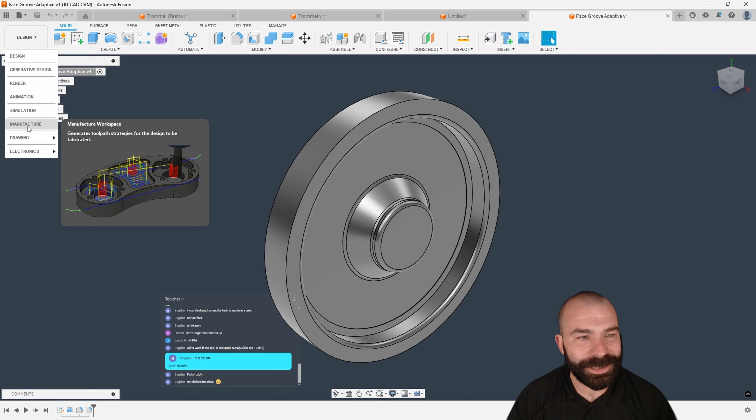As you can see, again, lovely part provided by Tim out there. Tim, I don't know if you're still there, but let's go ahead and switch to manufacture and create our setup like always, XYZ.

We're going to go ahead and sheet the system with some normal size stock. Face grooving adaptive was my hope. Okay, yeah, no problem. So what we're going to do is we're going to go ahead and do our turning grooving. Where is it here? Turning adaptive roughing.

$5.40. Hey man, that's still, if you guys didn't know, we have $2 cans at the local bar by me. To me, that's 3 beers. I will drink that all day, every day.

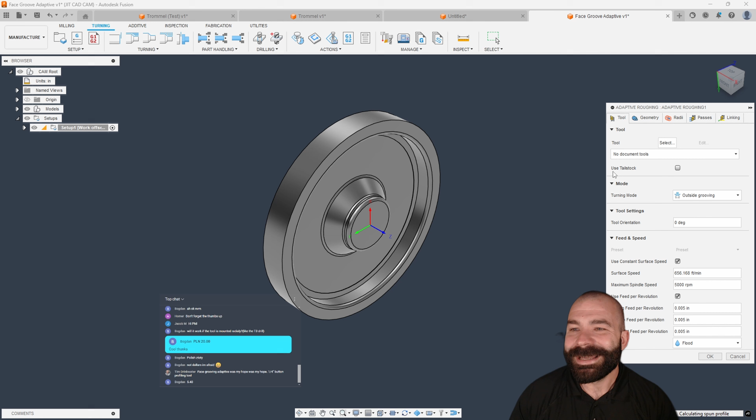So as you guys can see, by default, you have outside grooving. You also have inside grooving. What I like to do is leave it plain as day and come back to it later to see which one we're really going to need. So we're going to go ahead and go with some OD grooving here. This is a lollipop tool.

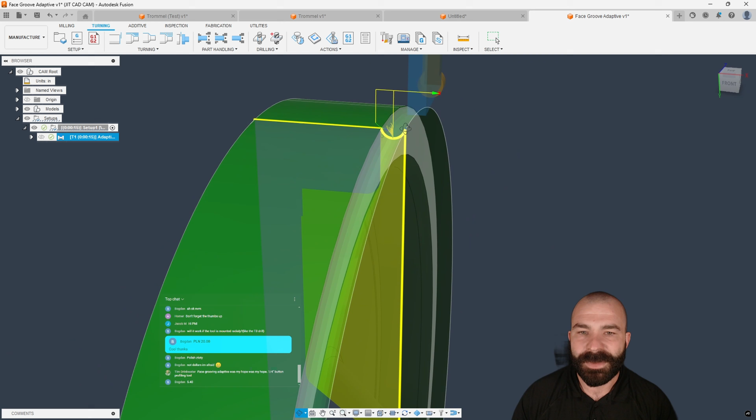Now I am going to have to rotate this tool at some point, but let's just see what we get, because usually what happens is, like I was expecting, this is an outside profile with a tool pointed down at my part, right? So let's get back in there.

Let's edit our tool. First, we're going to start by pointing that tool a little different direction. Again, we're going to go ahead and hit OK.

And as you're going to see, I just caused Fusion to crash. So we're not going to send the error report. We're going to hope that she stays here. It doesn't look like she is going to crash.

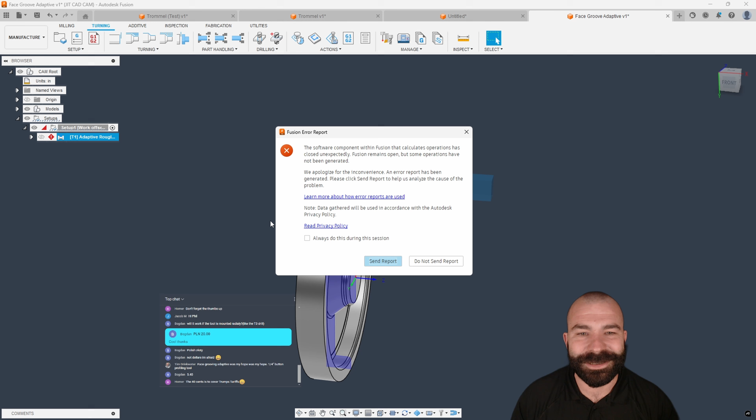Now, as you can see, I'm going to go ahead and make a secondary change because it's not liking that, which is going to be, let's do inside grooving and see what happens. So again, I don't think we're going to actually get this to work. Axial retract is greater than axial stock. So let's go ahead, and axial usually means long, stock front, stock back. I think we are getting a limit issue here.

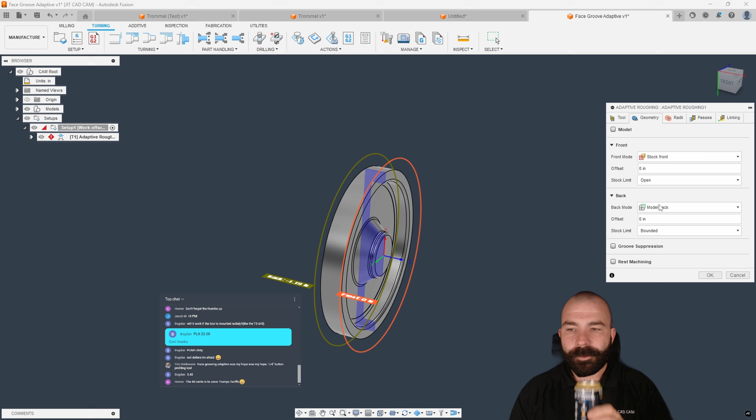And let's see what we can come up with. So again, it looks like we are getting some type of issue. Axial retract distance is greater than axial stock. Yep, when in doubt, pull it out. Nope, still nothing, right? So let's go back in.

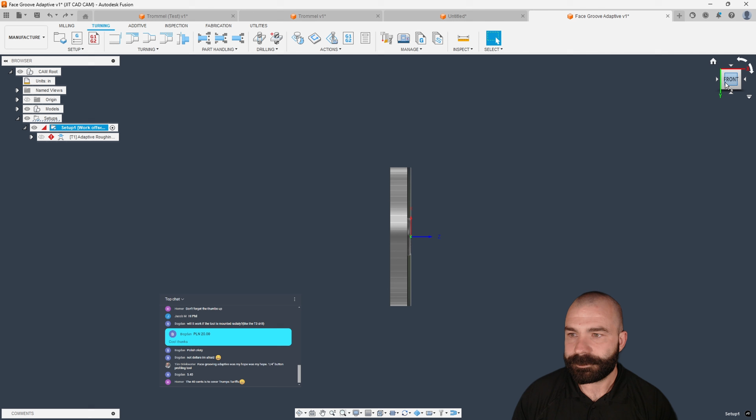40 cents for the Trump tariffs. Love to hear it. All right, let's see here.

We're going to go ahead and dive through this a little bit bigger. Approach in Z, retract in Z. That's beautiful.

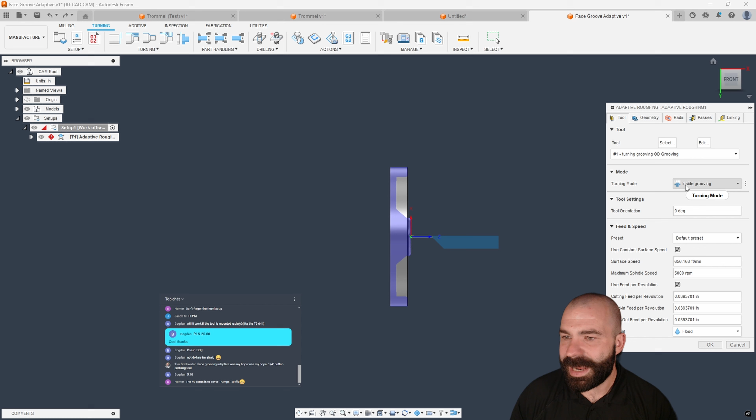Yes, yes, yes. So as a whole, I think the problem is coming from the fact that I have seen this, and I think I know what it is now, looking at a side profile: there's not really anything radially to start with. So let's go ahead and change something.

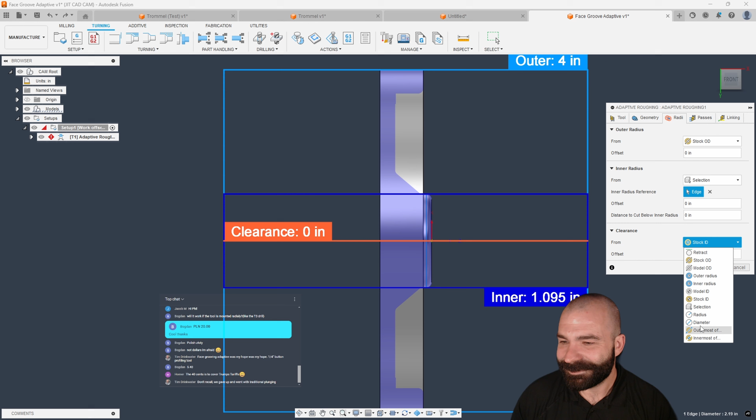We're going to go ahead and do a selection here, and then what I am going to do is we're going to make this also inner. Now this is going to look really weird for a lot of you out there. The problem is, I think, when it's trying to retract off because it's inside grooving, it's hitting this lug in the middle, and it does not like that. So we're going to go ahead and bump that out just a little bit further.

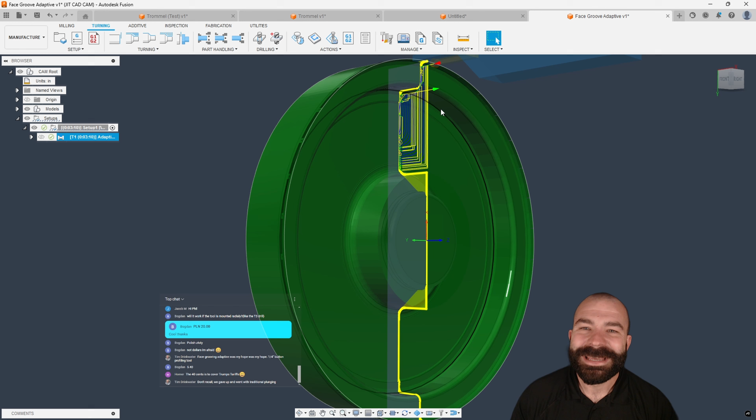Because again, it's more important to get a tool path at first than it is to really get the right tool path. So it's like I'm thinking, and I've seen this a lot, and I know Autodesk is working on it, it's due to the profile we're working with. Pro tip here for you guys: if you ever are working on a lathe or an inside profile, do a section analysis under the inspect tab.

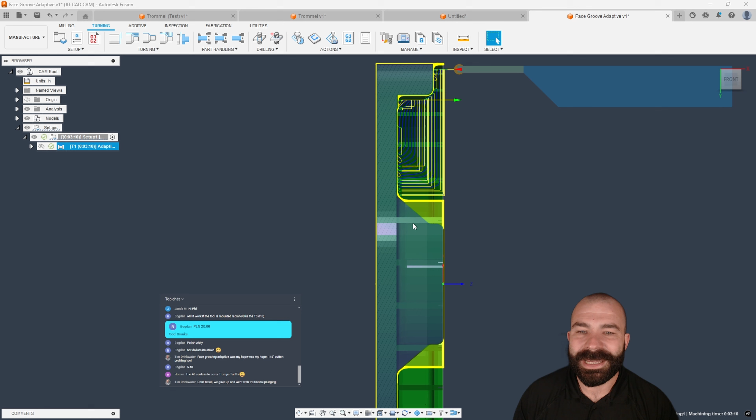This will split your part in half, making it much easier to see what's going on. As you can see, this lug in the center is part of the problem, right? So let's go ahead and make a few more changes to this.

Again, we have our radii working here. Let's go ahead and move our clearance inwards. Now it's not going to like that, which is no surprise, but maybe we can sneak this guy out a little bit further without having those problems. There we go, we've moved outwards, still having those problems.

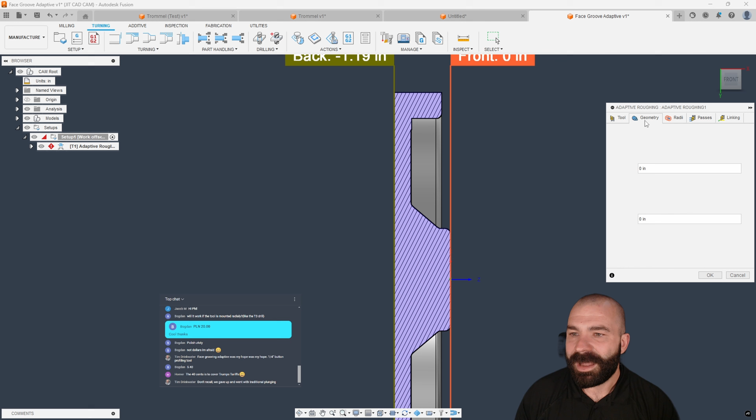I'm curious if we actually switch now to outside grooving. There we go. So it was yours truly fighting the system, because usually people don't give me a center hub with all kinds of problems.

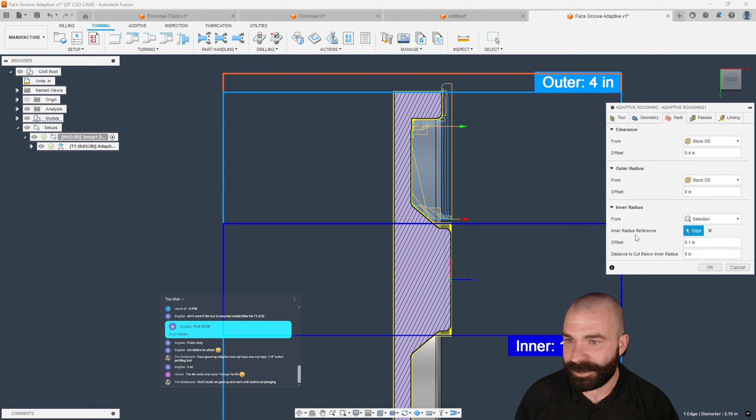Tim, just kidding. So again, we're going to go ahead and just leave this to inner radius, if I can find it. Inner... oh, we're outside now, of course we're outside. So we need to actually come down to here, and leave this at 0.

Tim, how's this looking? Tim, you're not complicated, it's just not the best of examples. But this is about as real world as it gets, guys, right?

Like, why is it that yours truly out here tells you guys, come here on Friday, hustle Fusion Phil with your problems, try to stump the chump, whatever you guys want to refer to it.

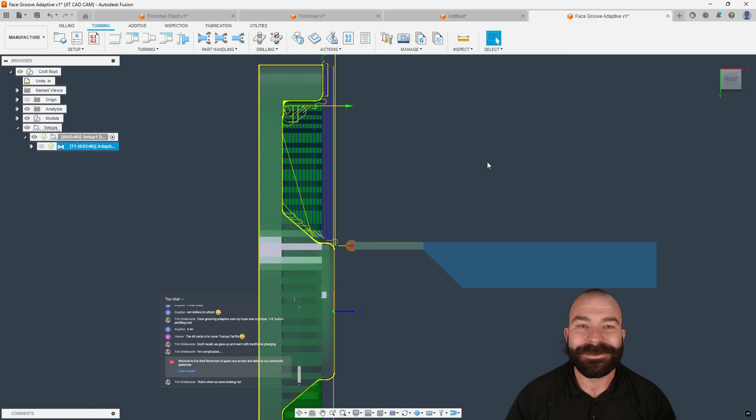So again, just running it from the top. This is my recommendation: I go turning, I'm going to go in for that adaptive roughing, I'm going to select my tool again, this time I'm going to hit OK.

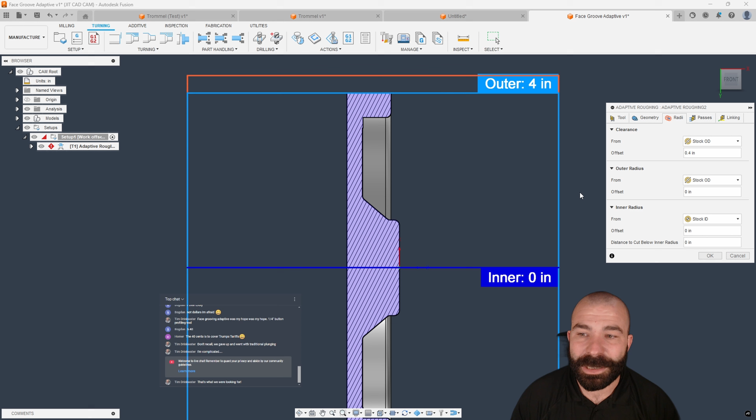I do get this error, and why we get this error, I don't really know. But upon going back in for some reason and changing my inner radius, I do believe it's because this little button in the middle is the problem. Maybe not, we might have to give it more than that again.

So again, we have our geometry, we have our OD. It's like, oh, I see what's going on. Okay, so let's go ahead and change that clearance to 0, and let's go ahead and change this back to stock ID.

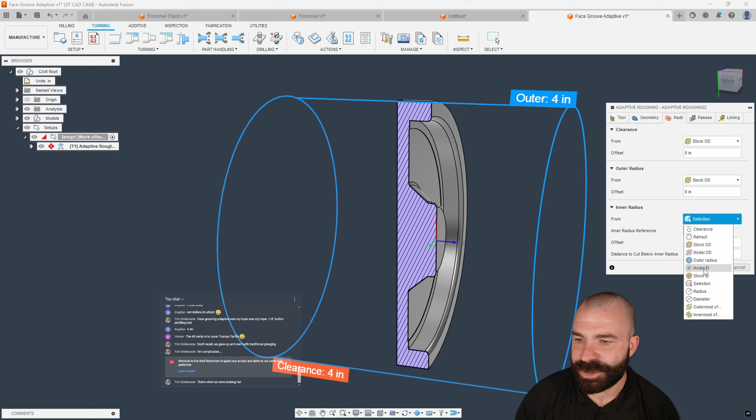Nope, still not working. Again, that is so funny, the way this thing just does not want to do it by default, but yours truly figured out a way. So let's do the trick, right?

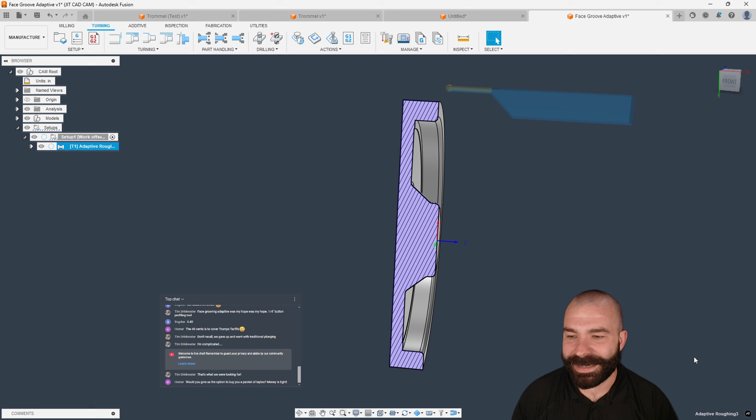Let's start this fresh: 2D adaptive clearing. This is going to be dumb, but it might work. Inside grooving with that tool, and then for some reason, I would laugh if we switch it to outside grooving and it just works. It does not. Okay, so I'm not completely crazy on my end.

Again, we go radii, let's go ahead and just give that inside area. And then also on our stock OD, I don't know why that would affect it. It shouldn't affect it. I think we also technically moved our stock front out as well.

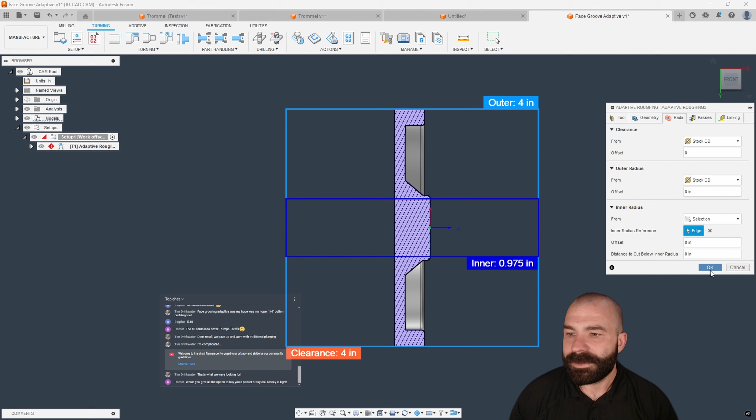And this is a fun one, Tim. Stock is way out in front, nothing in the back. We are still stuck to outside grooving, which is correct. Stock OD. It just does not like your part, man.

Let me see here. Shouldn't have been linking, shouldn't have been anything else. Oh, you know what? Let's do, this guy needs to be radii, right? Still doesn't work. And then we went back to outside grooving. Yep, I don't know, man. I got it, I had it.

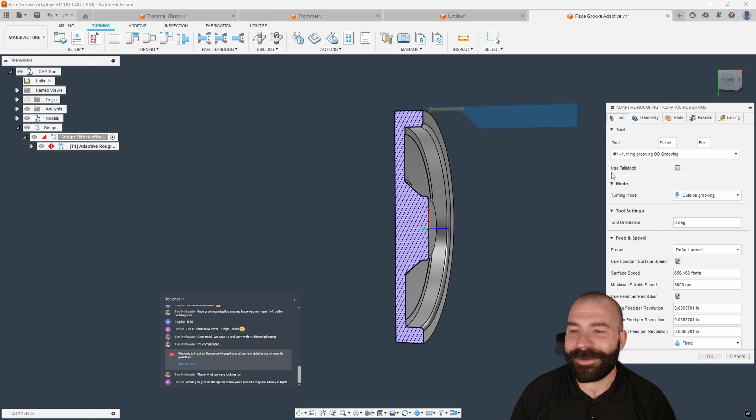We have it recorded. It should work, but it doesn't. Let's see here. You know what? I have a few other tricks up my sleeve. Let's do this, let's cheat the system today. We're going to do turning profile roughing, based on outside profile vertical passes, just because it'll be funny.

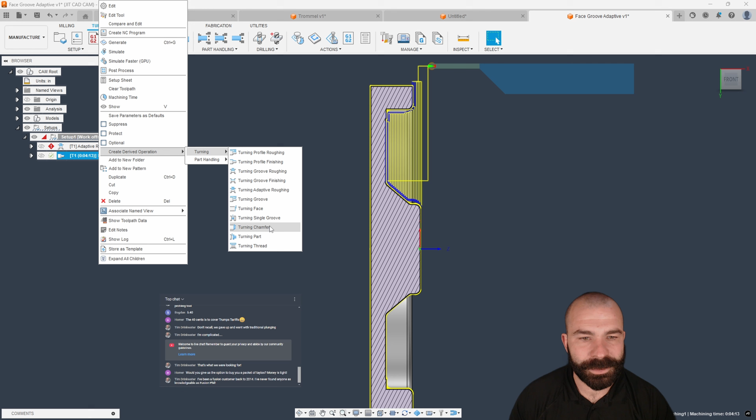As you can see, that is now working. Get our radial and axial grooving system going, that way we can work down in there. And what happens if we go ahead and derive now over to our adaptive roughing? It just does not want to do that.

An unexpected error. Autodesk, we know you guys watch these videos. Can you tell us why it doesn't want to do this?

That is true, Tim. Since 2014 you've been inside of Fusion. I think, honestly, thinking back, I may have even talked to you when I worked at Autodesk, as well as my transitions over to becoming my own reseller. So, man, this one is just one of them ones. Just one of them ones, right?

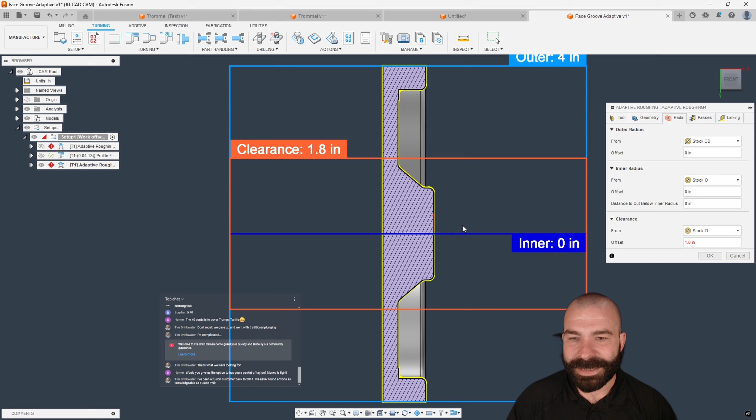I'm curious if we can get it. Yep, axial distance. You know what? It's dumb, it is dumb, but sometimes it's the nut behind the switch, right? Let's move these guys out a little bit.

Again, unexpected error. Shouldn't make a difference. Yeah, it's not making a difference. Yeah. Oh, you know what, we did open, didn't we? Go back to 0. There it is.

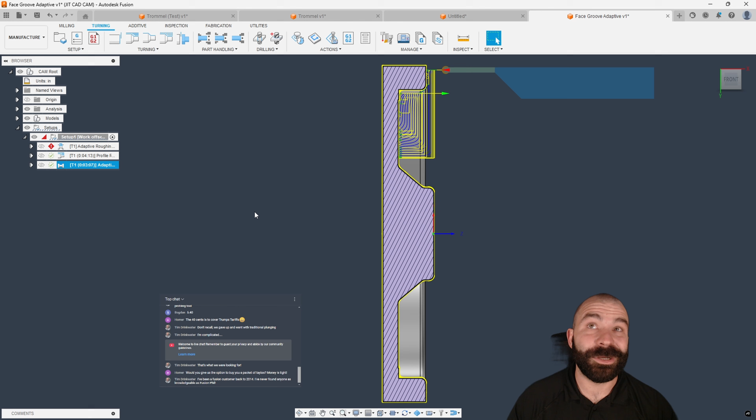We're getting there slowly, Tim. We are getting there slowly. For those of you here, probably in an air-conditioned office, if you guys didn't get a good laugh out of our Facebook post today.

Again, let's do it. Outside. Leave everything the same, let's just open up that stock limit. And of course it works. There it was, Tim. There it was. We got to switch from closed to open at the end of the day.

You guys hold on for one sec. See, one of my customers is trying to call me. We got a lot of calls coming in. How's everybody's Friday been otherwise?

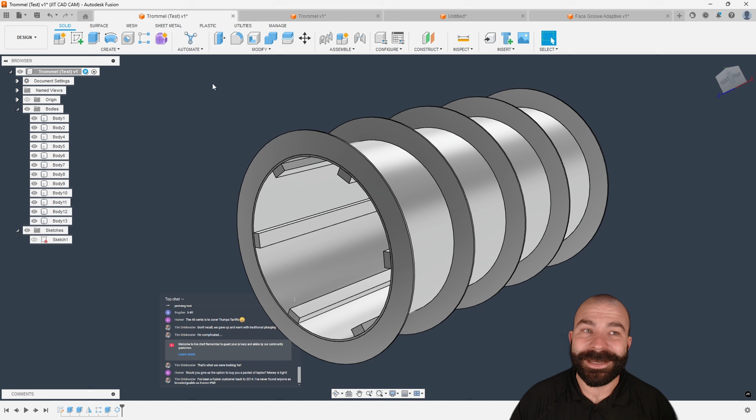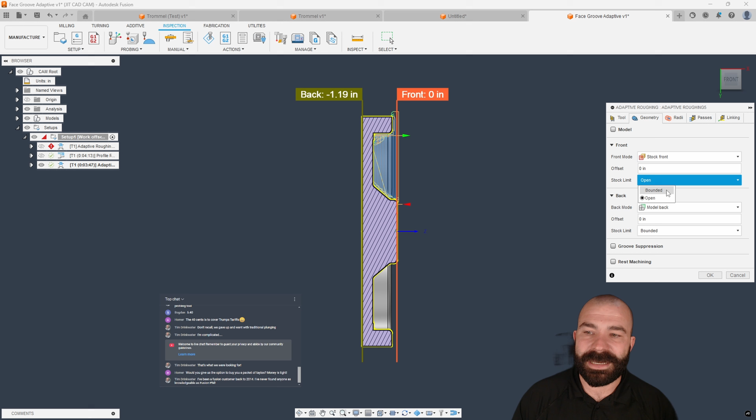Again, Tim, all I did after all of that commotion - this is why, guys, this is why a proof of concept, bad ideas, right? As you can see, all I had to do was change the stock limit from closed, or actually bounded, which technically means it respects it, right? It respects that boundary, to open. This is the exact same thing as a closed boundary versus an open boundary, right? That's all I did. At the end of the day, I swapped from bounded to open, and just like that, that adaptive clearing toolpath worked.

And of course, to sprinkle a little bit more onto this, we could go ahead and right click, do our turning, profile finish. Of course, we want to go around the outside of this. Again, radial and axial grooving here, guys. Go back to our passes tab.

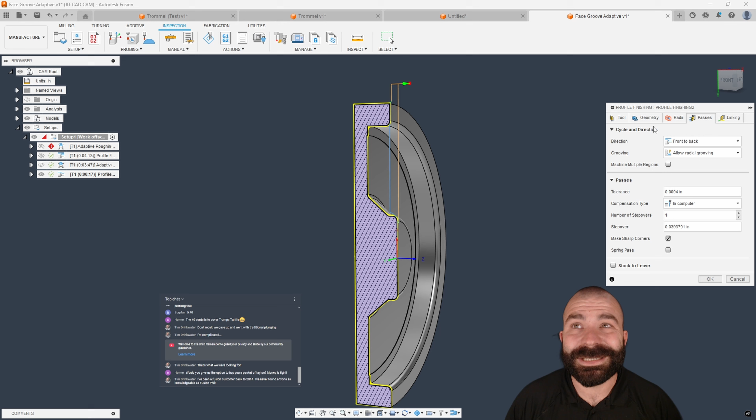Now, again, this is why we do these free Fusion boot camps, guys, is because when we walk through the steps with somebody new, we always say, get your toolpath in Z here, we want to get it in X. And then notice my blue line is not going within that boundary. So let's go ahead and go to our passes tab. We can see here, allowing radial and axial grooving is going to allow that finish cutter to come down and around that inside profile and cut out our material.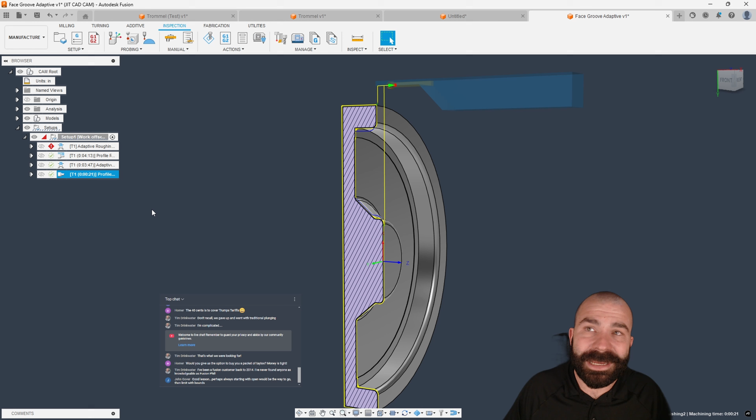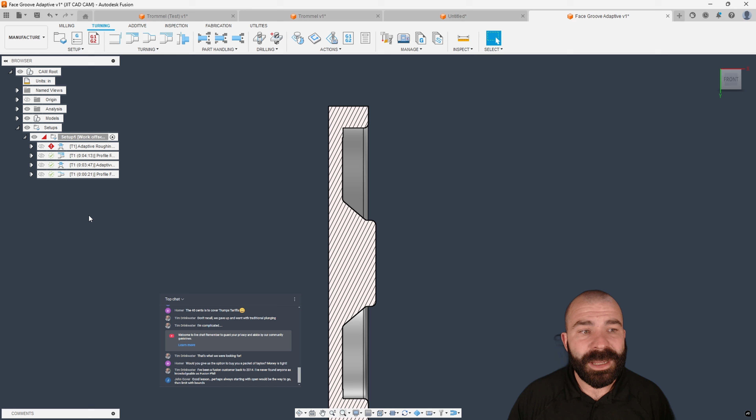John, it's a hard way to say it, right? I don't know, at the end of the day, because if I was to go back to turning - this is just a curiosity of my own right now - if you notice, I'm picking profile roughing. There is no open or bounded, right? It's that adaptive that is requiring open and bounded type settings. So it's only in certain toolpaths, again, and it could even be - well, technically on that toolpath, we can't really pick a different tool than a button cutter. But as you're seeing, it's only in that adaptive type scenario are we seeing a bounded Z-axis geometry issue.